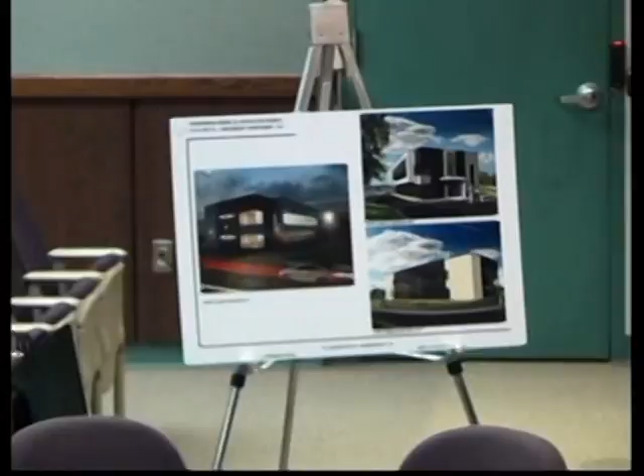Toward the driveway, we have two wall-mounted lights on either side of the projection on the second floor. There are also recessed downlights called out on the elevations in that 4-foot cantilever, which shine light on the pathway and act as an accent feature for that cantilever portion. The same applies on the other sides, with two wall-mounted lights on each side, plus whatever lighting is required for the exit doors for the staircase.

The principal entrance to the building would be on the parking lot side, correct? Absolutely. And there are two other means of ingress and egress on the southerly side of the building, correct? You're right. Is the building sprinklered? It is sprinklered.

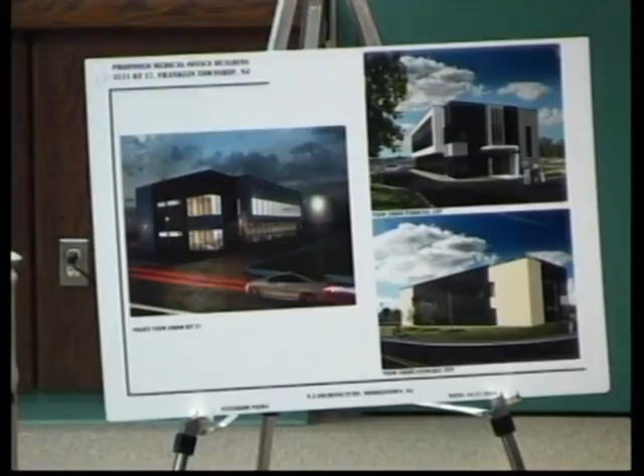Where will the HVAC systems and mechanicals be placed? Typically, as with other buildings, it would be up on the roof. Is there a parapet around the building so the mechanicals are screened? We've decided to go with a 3-foot parapet all along, and a 4-foot parapet where the cantilever is, which is where we envision the HVAC units, so it's completely screened.

Thank you, I have no further questions of this witness. Any questions from the board?

Just as a matter of curiosity, I noticed bathrooms on the second floor but not the first. Good question — I prefer in my designs to centralize the sanitary facilities as much as possible, so that's one reason to have it on the second floor rather than giving each suite its own bathroom unnecessarily. The first floor layout is still to be decided, since it's only one tenant, the building owner, who will occupy it. They will dictate, based on the medical practice, where and how many bathrooms they need.

Good question. Any other questions? Just one question.

You'd mentioned that on the driveway side of the lot, under the cantilever, there was going to be a sidewalk there. The plans actually have landscaping there, and I don't really see the need for a sidewalk, so I guess you can clarify what actually is proposed. That's something our engineers should be able to suggest. We did show a green walk over there, so whether it's going to be a sidewalk or not—do we have a sidewalk? We don't. Okay, so it is still going to be a green patch. All right, thank you.

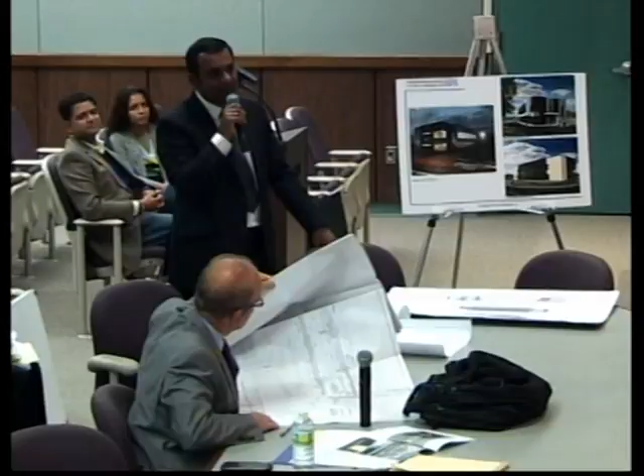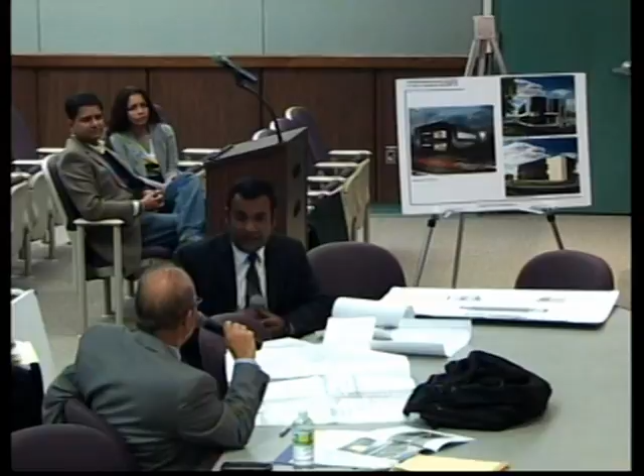Can I just ask one more question very quickly? There is no signage proposed as part of our submission package, is that correct? Currently, that's the case. We would propose to put a conforming sign on the building. The ordinance allows an attached sign on the building of 30 square feet, and we would propose to place a conforming sign on the Route 27 side of that building. So certainly, it's going to be a conforming sign on the Route 27 side. Also, there probably might be a building number on the corner where the driveway is.

Okay, thank you, I have no further questions. Okay, who's your next witness? Thank you very much, Ms. Patel.

Do you swear the testimony you're going to provide us the truth, the whole truth, and nothing but the truth? That's right. If you could state your name, spell your last name for the record, and provide your address. My name is Jignia Patel. You have to speak louder or hold the microphone closer. My name is Jignia Patel, Patel, P-A-T-E-L. Address is 50 Meadowlark Lane, Belle Mead, New Jersey. Okay, Ms. Patel, you can have a seat.

Ms. Patel, what is your occupation? I'm office manager or the owner of the medical practice, 247 Heart and Vascular. Are you a physician? No, I'm not. You're just a manager of the practice? Yes. And you are building the building or leasing the first floor of the building to the medical practice?

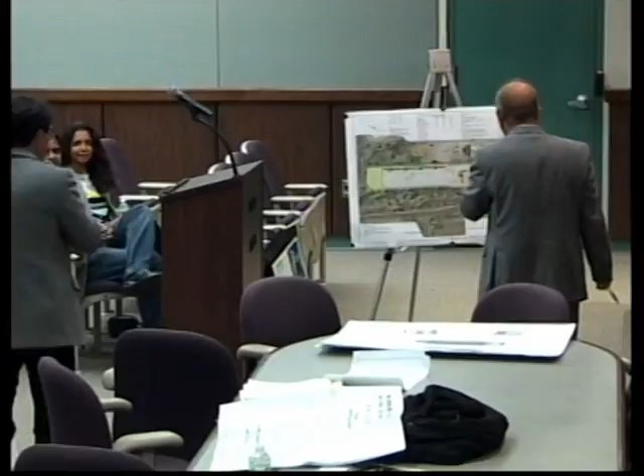Mr. Ford, A3 is a colorized rendering of the site plan that was submitted in conjunction with this application, correct, and part of your plan set? Yes. And what we're marking here, A4, is basically the same plan with an expanded view of the surrounding area, which wasn't part of the plan set.

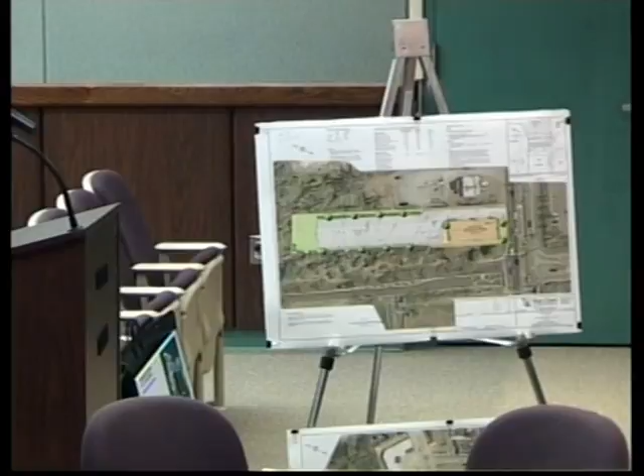Mr. Ford, obviously you're familiar with the subject property and also the land uses surrounding the subject property, is that correct? Correct. First of all, can you briefly describe the subject property, its dimensions, and what's located on the subject property at the present time?

We're located at the intersection of Stewart Avenue and Route 27. Stewart Avenue is at the bottom of the page, and Route 27 is on the right-hand side, the south end of the property. The intersection is a signalized intersection controlled by a traffic signal, and you can see the turning movements in the aerial view beyond the property. The property, the subject of the application, is what's colorized in the center of that plan. It's a rectangular shape. There is an existing dwelling on the property and a driveway to Route 27, which will be removed as part of this application.

For the record, this property is actually not at the intersection because there is a homeowners association, part of Society Hill, that is actually between our property and the intersection and between our property and Stewart Avenue. Is that correct? That's correct.

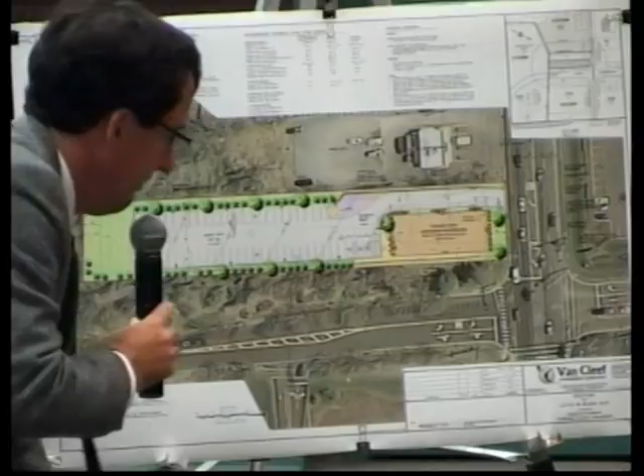And what is to the north of the property? North of the property is a retail building, I believe it's known as Tasty Sub Shop. Then beyond that is a daycare center and the new IHOP facility, which you can see in the bottom rendering. The sub shop, the daycare, the IHOP, and the retail beyond IHOP, which I understand was developed as a unit.

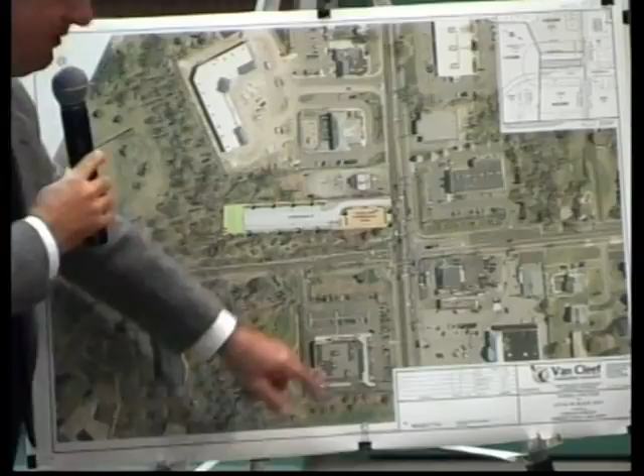And then to our south is the Walgreens pharmacy. As long as you're on this topic with this sliver of land, it might be worth mentioning what is noted in the staff reports, because one big question is, why wouldn't the driveway be out to Stewart Avenue? The sliver of land we're referring to is this sliver of land, and I think this would probably be a good time to explain that whole thing, right?

Yes, if I may, I can do that. When the applicant came to me, and when we sat down with Mr. Ford, we tried to look at various ways to get other access to the subject property other than through directly onto Route 27.

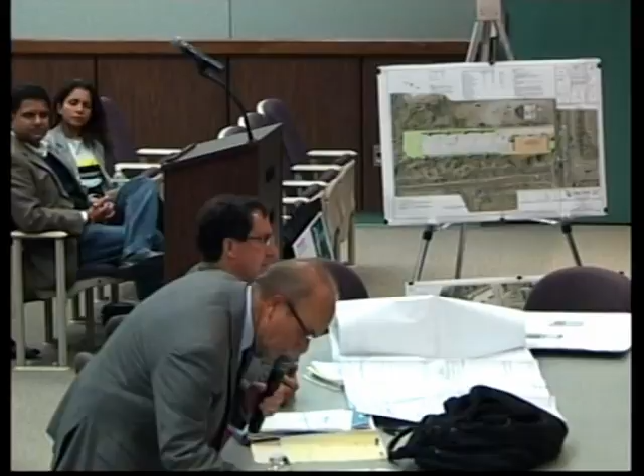On November 5th of 2014, I did send a letter to the Society Hill 2 Condo Association, which we can mark as A5, am I correct? You are, yes. And asked if they would grant us an easement to get out to Stewart Avenue, similar to what they did with Walgreens across the street from us.

They, through their attorneys at Hill Wallach, on November 26th, responded that they had a discussion with the association and that they were not interested in granting any easements out to Stewart Avenue. So I will mark that letter from Hill Wallach as A6.

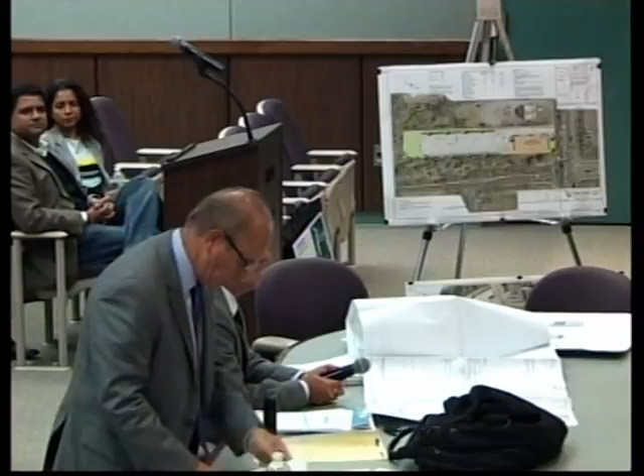And I believe Mr. Healy also attempted to reach out to the association. Certainly from a site planning perspective, a curb cut on Stewart would be much more preferred than one in the intersection on Route 27. So with that in mind, I also tried to contact their attorney, left a message.

That message was not returned. I also went the other way and contacted the owner of the property to the north of us to see if they would be willing to sell their property so we could have a common or shared driveway or work something out. I sent them a letter on September 9th, which I will mark as Exhibit 7. Mr. Lanford, September 9th of this year? 2014, I'm sorry.

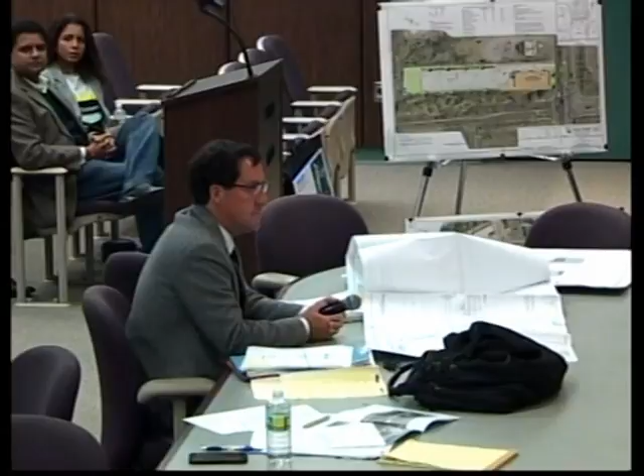In response to that letter, I did have a few phone conversations with the owners of the adjoining property. When all the dust settled, they indicated they were not interested in selling their property to us, so that went out the door. So that deals with the issue of alternative methods of ingress and egress. Are there any questions on that?

Did you make any attempt to contact the homeowners association directly rather than through their attorney? No, I wrote the letter to the association. It was sent to the association, and the association responded through their attorney. I also called and left messages at the association which were left unresponded to. So you did call them as well? Yes, I did, in addition to sending a letter.

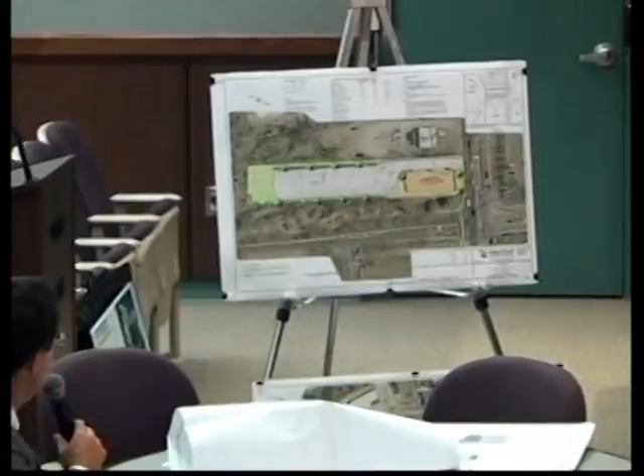Mr. Ford, can you take the board through what we are proposing on the subject property? The proposal is to eliminate the existing driveway on the south side of the property, closer to the intersection, and create a new driveway to Route 27 on the northeast side of the property, traversing alongside the building to a 55-space parking lot at the rear. The property generally slopes to the rear, or to the north.

As was discussed, we actually prepared concept plans that included the driveway out to Stewart through the homeowners association property, to illustrate what would be needed to perfect that. That was our preferred option. And obviously, as just stated, the owners of that property were not interested.

The main entrance to the building is actually at the rear of the property, immediately adjacent to the parking lot. There's landscaping on both the east and west side of the parking area, and there have been some landscape plan comments in the reports that we will comply with. With regards to utilities, Route 27 at the frontage actually services the existing building or house, which will obviously be repaired or upgraded as needed. There is existing public sewer, water, gas, and electric.

There was a comment in the review memos, and this goes to the introduction by Mr. Lanford, regarding staff discussion since we received the reports.

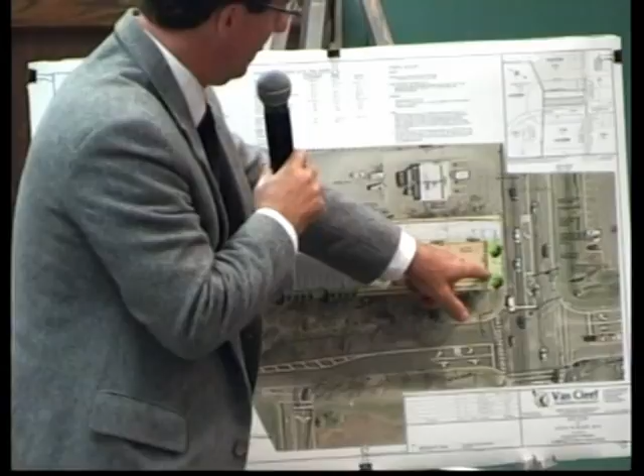In Mr. House's report, there was a suggestion that an on-site fire hydrant be placed, and I had correspondence with Mr. House via email with a sketch showing there is an existing hydrant immediately in front of the property, near the intersection, literally about 25 feet from the proposed building. The building will be fully sprinklered, and the fire department connection for the sprinkler system will be placed in the front portion of the building, about 25 feet from that hydrant. With that explanation and sketch, Mr. House was satisfied and felt there wouldn't be a need to provide a hydrant on site.

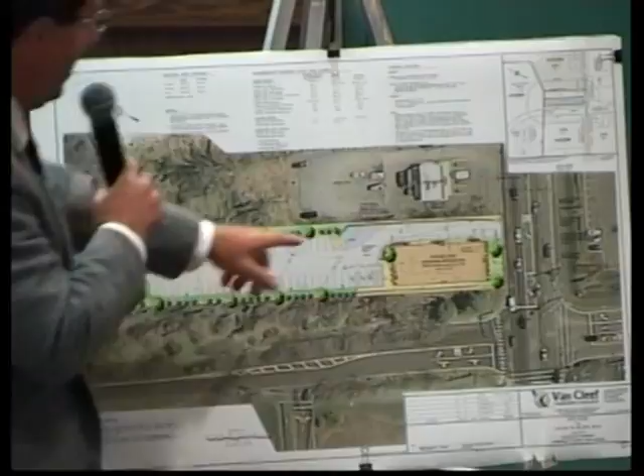So there would be all the utility connections in the front of the building — public water, sewer, gas — and that fire department connection in close proximity to the existing fire hydrant. There was also a request by Mr. House to not only stripe the access driveway for no parking on the west side, but also on the east side as well. We'll comply with that request.

Any other? I don't want to get into too many detailed gearhead engineering. Discuss on-site circulation, please, and then we'll go back to all of the staff reports. Yes.

This ties in again to that alternate access, or a different access. Because of the shape of the property and the only frontage being Route 27, we're limited to the configuration with a dead-end parking arrangement.

In a practical sense, it's envisioned that the parking spaces closest to the building would be filled first, and people would fill the spaces toward the rear of the property last. We've placed the handicap parking spaces immediately adjacent to that main entrance, which is at the rear of the building, or the opposite side of the building from the frontage on Route 27.

We've also placed the dumpster enclosure on the other side of the driveway opposite the handicap spaces. From a practical sense, the dumpster is not too far away from the building itself, and it provides for a turning movement of a garbage pickup truck for that dumpster, which would be a private hauler that the owners of the building could coordinate pickups with so that it's off hours.

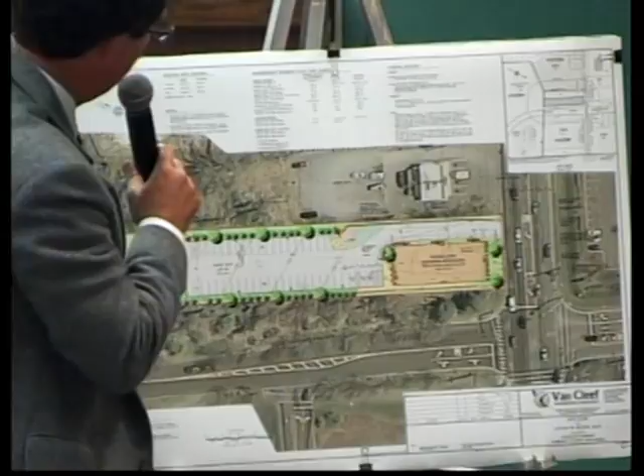There was a suggestion that the trash enclosure be moved to the rear of the parking area, and I'll highlight what I understand that to be, which would be the trash enclosure being moved from here, where a truck pulls in, picks up the trash, utilizes a wider access area next to the handicap space, makes the U-turn, and exits the property.

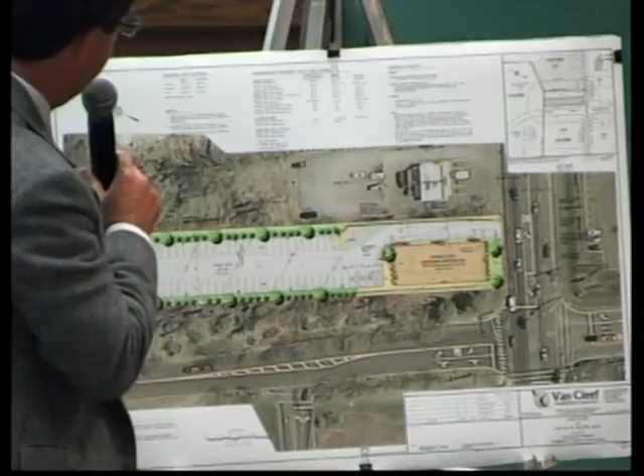The trash enclosure alternate location that was suggested in the professional's review was at the end of the parking area, which puts it quite a distance from the building, and also a longer distance from Route 27 for the truck to pull down and back up and make that maneuver.

Our preference, after discussions with the owners and the primary tenants of the building, would be to leave the trash enclosure where it's at. In this day of technology, I had email and voice mail communication over the last 48 hours with your engineering department staff, and I explained the owners' reasoning as to why the trash enclosure is located where it's at.

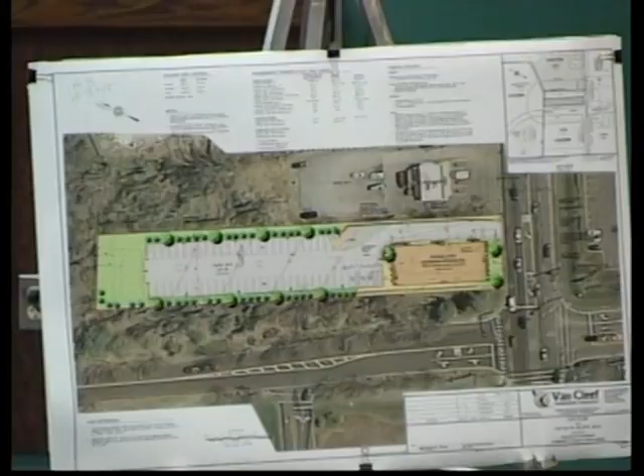He understood that and suggested that we make this presentation tonight, and it would be up to the board's purview of how you'd like to proceed. We would certainly, as any condition of approval, work that detail out with your engineering department to their satisfaction. But our preference is obviously to leave the trash enclosure where we're proposing it.

Right. Correct. All right, can you indicate to the board what the trash enclosure is going to look like? I think right now we have a plan detailed that's one of those typical concrete slabs with the board-on-board fence around it.

What was discussed after receiving the staff review memo was that the trash enclosure would be constructed of material emulating the proposed building. That is, a masonry trash enclosure with an exterior stucco finish that would match the building. And the gates in the front would have to be wood slats, not a chain link fence, to obscure access to the dumpster and also make it a more visually appealing structure.

Are we proposing any lighting within the parking lot? Yes, there is parking lighting, and there was one of the staff review comments that we would comply with, to provide some additional lighting in areas that they felt were underlit.

Can you just briefly take the board through the landscaping plan that you propose in conjunction with the project? Street trees along the frontage. There's been, as part of the application submittal package, a tree preservation and mitigation plan that is in accordance with your ordinance, where the trees to be removed are replaced at the mathematical required standards in accordance with the ordinance, and those trees are a mix of evergreens and deciduous down both sides of the parking area.

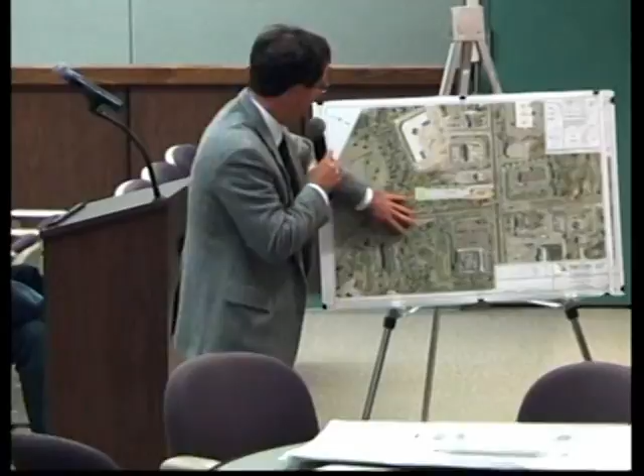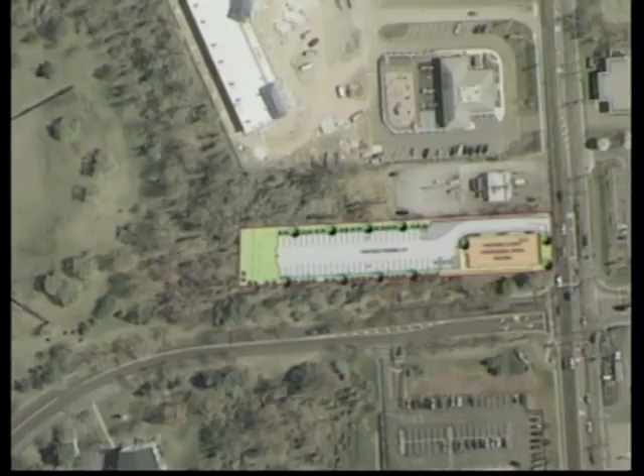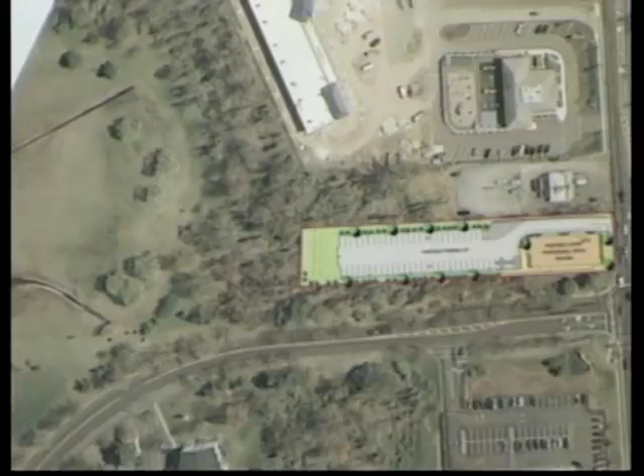There's a requirement to have buffering between the residential zone and our site activity. We didn't plant trees there because immediately adjacent to us—and this exhibit was prepared to illustrate this, since there were also questions in the staff reports to clarify for the board's consideration—is what our immediate neighbor looked like. Our immediate neighbor is basically the stormwater detention basin for that residential community, and the closest building in that community is shown on the other side of Stewart Avenue.

What's that little patch of green in the rear? There's existing vegetation there now that we wouldn't disturb. We leave it alone. Yeah, do that. And that's where the stormwater runs off now.

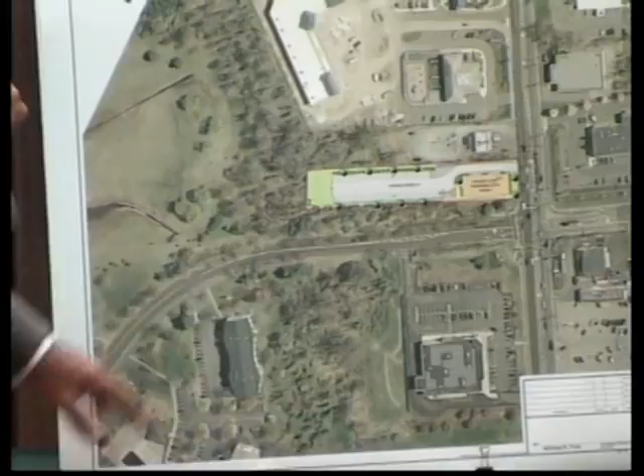There was actually a comment in the reports about the stormwater management system, which is a porous pavement system with an underground infiltration stone detention system—if that were to fail, if the porous pavement became completely clogged, what would happen, what would be the potential adverse impact to our immediate neighbor? Again, our immediate neighbor is the wooded area, and then beyond that, the detention basin for the residents to the rear.

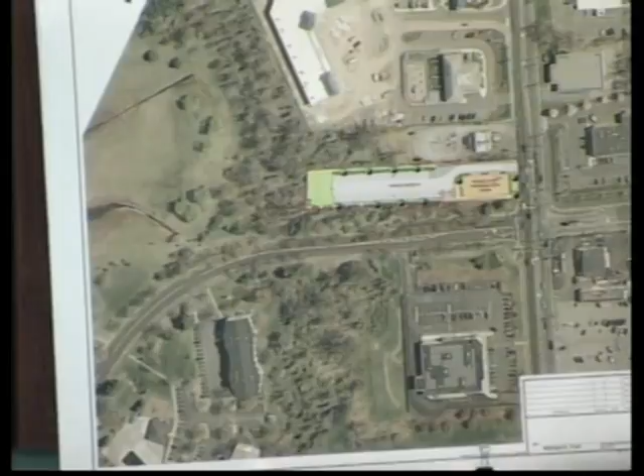And you have no problem doing more columnar-type trees in the front? Not at all, yeah, all the landscape comments are not an issue. Okay, good.

Just briefly, the variances that we are seeking are a lot frontage variance, is that correct? Correct. The lot frontage in the NV zone is 100 feet, and our lot frontage is 85 feet. That's the existing condition, okay.

And the other variance is a way of correcting that, which also probably could have been mitigated somewhat if you were able to acquire that strip of land, or even an easement. But if you were just able to acquire it... couldn't do that, so. Exactly.

And the other variance is the parking variance, which Ms. Dolan—when she walked through the door, no wonder we're talking about the trash enclosure so much.

Should I—talk slower? No, staff reports, you just want to go through those and anything you can't comply with? I think we've basically hit on all the key elements.

What's with the health report? Oh, that was a citing of a violation because the grass got too high on the property. It was cut, the violation was taken care of and resolved. That was done months ago. They want to take you to court for that? They had wanted to, yes.